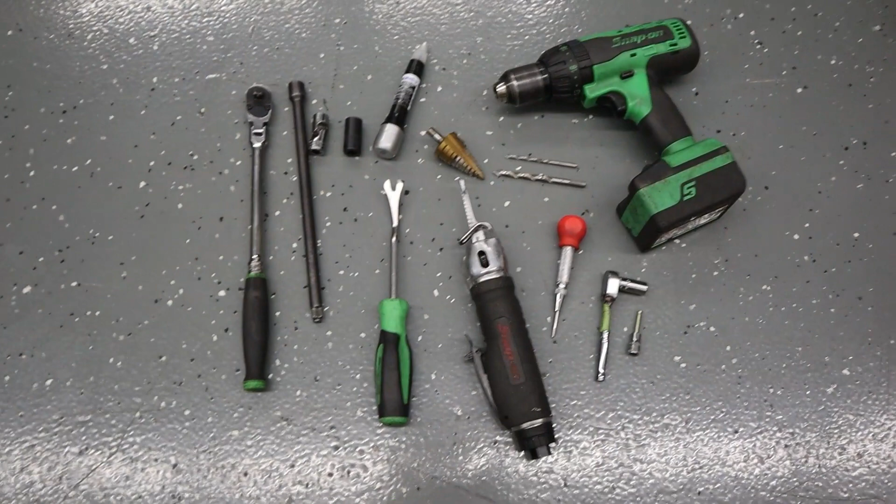Okay, tools we're going to need in order to do this. You're going to need a 3/8 ratchet, an extension, and I like to use a 13mm universal socket. You'll also need a regular 13mm 3/8 drive socket, some touch-up paint, and a panel popper or clip removal tool.

We'll need a body saw. You can also use a cutoff wheel if you want to use that to cut out the holes for the differential cooler. We'll need a step bit to make sure that we have a nice radius on those cutouts, and then an 1/8 inch drill bit and a 1/4 inch drill bit to precede the step bit, and a center punch for said drill bits.

A ratchet - I like to use a 1/4 inch ratchet on the 10mm stuff, a 10mm socket, a 4mm Allen socket or Allen key, and of course you'll need a drill for your drill bits.

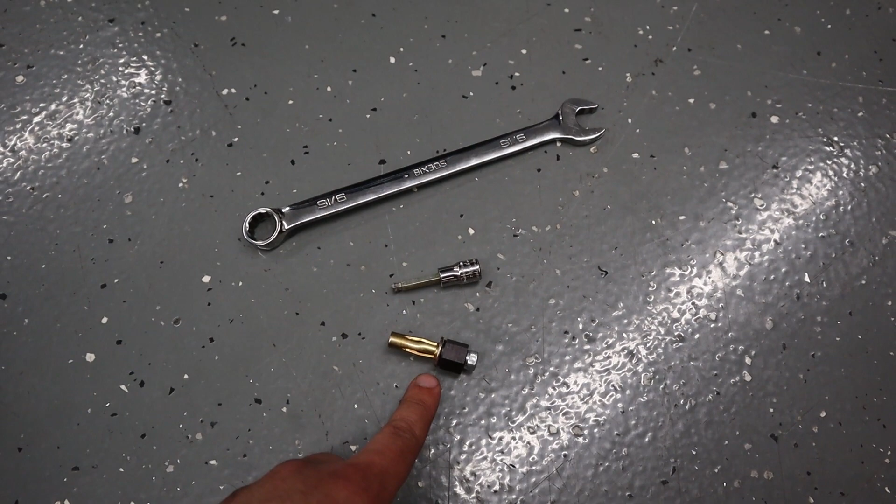Separately, for the rivet or riv nut installation tool, we're going to need a 5mm Allen socket or Allen key, and you'll need a 9/16 open-ended wrench.

All right guys, so the first step is to jack the vehicle up so you can get access to the underside of the car, make sure it's secured properly.

Then the next thing we're gonna do is unbolt the factory diffuser panel, and that's gonna be held on with two 10mm head bolts in the rear here and two 10mm bolts in the front. They're gonna be facing towards the rear of the car. There'll be a number of push clips here. And once you have all of that removed, you can basically go ahead and take this diffuser panel down.

I've already undone all the bolts and most of the clips, so I'm going to pull this diffuser panel down right now.

So once the rear diffuser panel is down and off of the car, we're going to have to cut or sand or break or drill the rivets holding the rear differential cooling duct off so that we can separate the two pieces from each other. And we're going to be taking the OEM ductwork that is currently on the car and transferring it onto your brand new diffuser.

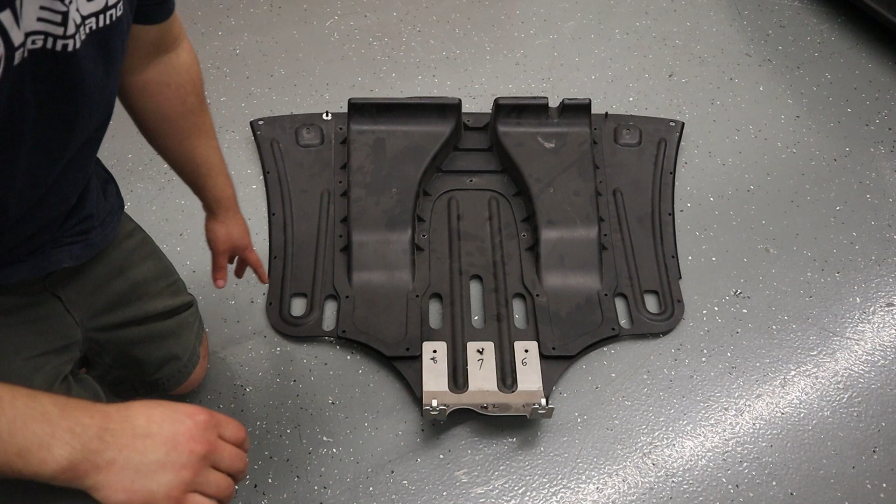Okay, so the OEM diffuser panel is going to look something like this. It's going to be held in, the ductwork is going to be held into the diffuser panel by a number of rivets that are around the perimeter of the actual ductwork.

At this point, you're going to want to basically snip off the back side of the rivet with a pair of cutters, or you could drill them out if you'd like. I opted for the cutters, I thought it was a little bit quicker. Drilling is going to be a little bit more time consuming, but it will ultimately be easier on your forearms if you have tendonitis like I do.

So once we get that off, you're going to be left with something like this. The OEM rear diffuser panel is going to go away, we're not going to use that anymore. And so all we're going to be focusing on is this.

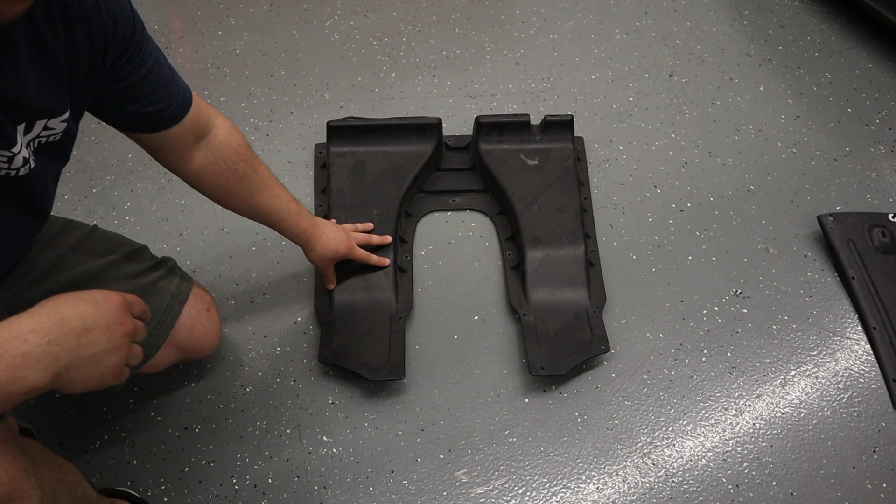Essentially we're going to be trimming this down at about this mark here in order to fit onto the new Verus rear diffuser. And to do that, we're going to have to cut out the templates that are provided with the kit. I'm going to show you that now and show you how to install them onto the diffuser so that you could get this all cut out correctly.

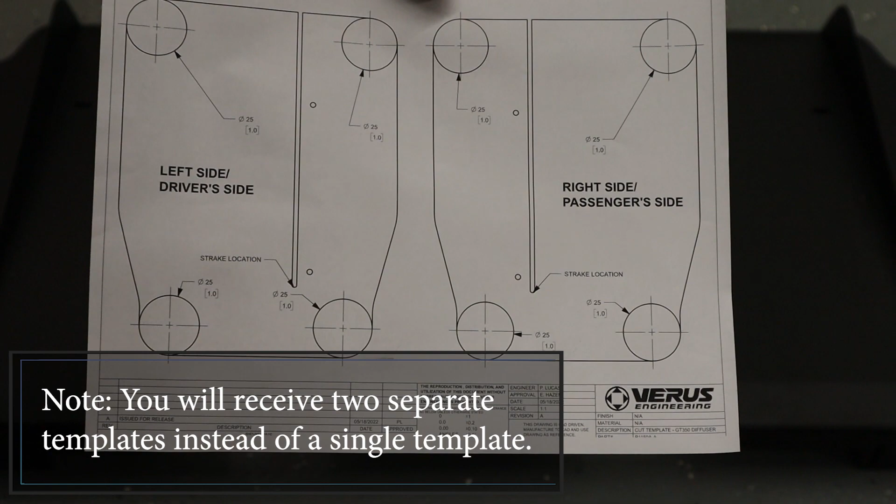All right guys, so here's the template that you would have received with the diffuser kit. Basically, we're going to want to cut these out. Make sure you cut out the center rib point here, and you're going to want to line this up with the strake that's going to center the template onto the diffuser. These are going to go around the two inner strakes on the diffuser itself.

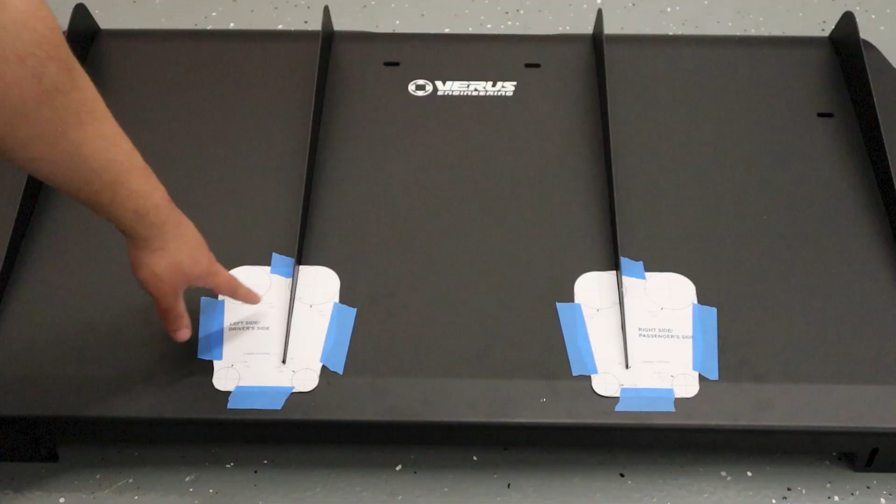As far as what we're going to be drilling here, basically we're going to drill out these 4 holes on each side or each template. I like to start with an 1/8 inch drill bit, step them out to a 1/4, and then use a step bit to take them out to 1 inch holes.

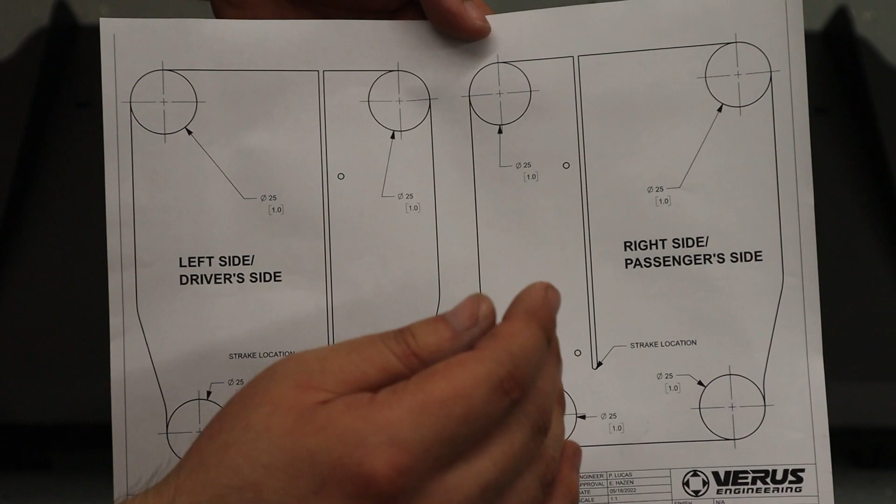You're going to want to center punch them first before you start drilling with your 1/8 inch bit. These 2 holes here are basically what hold the strake into the diffuser panel. So you'll want to center punch these as well, then drill them out to 1/8 inch, and then drill them out to 1/4 inch. That's going to release the strake from the diffuser material.

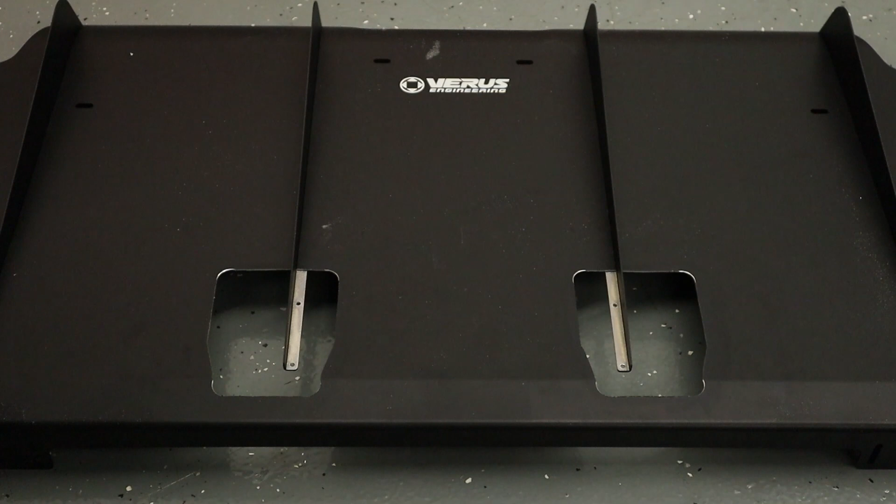Once you have that all set up and drilled out, you can cut out the material using a cutoff wheel or a body saw, whatever you feel is necessary or whatever you have available to you. Once you're done, you'll end up with something similar to this.

You'll notice that this flanged portion on the strakes on each side is pretty ugly now, so what we're going to do is cut off this flange. You can kind of see the silver part - we're going to cut that off so that all you see is the straight strake in the duct passageway here.

Once we cut that off, we're going to go ahead and clean up all of these edges. We'll touch them up with some touch-up paint on the raw sides or anything that's exposed, and then we'll be ready to go ahead and install the diffuser.

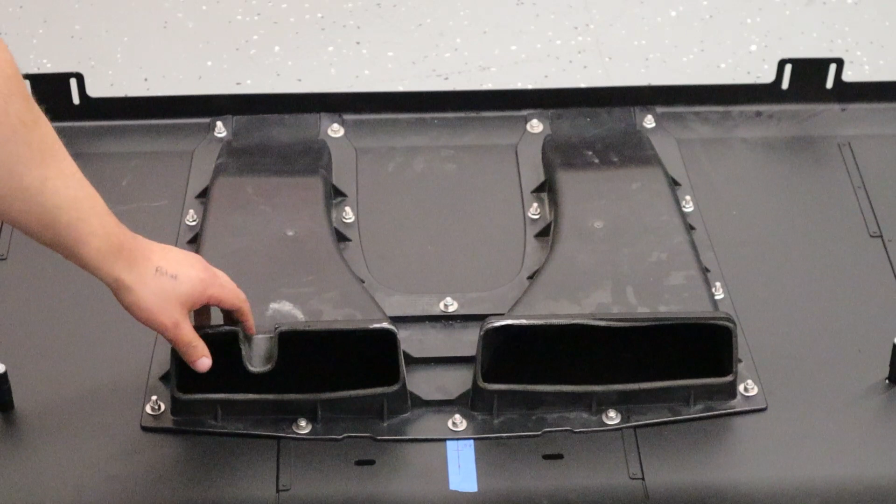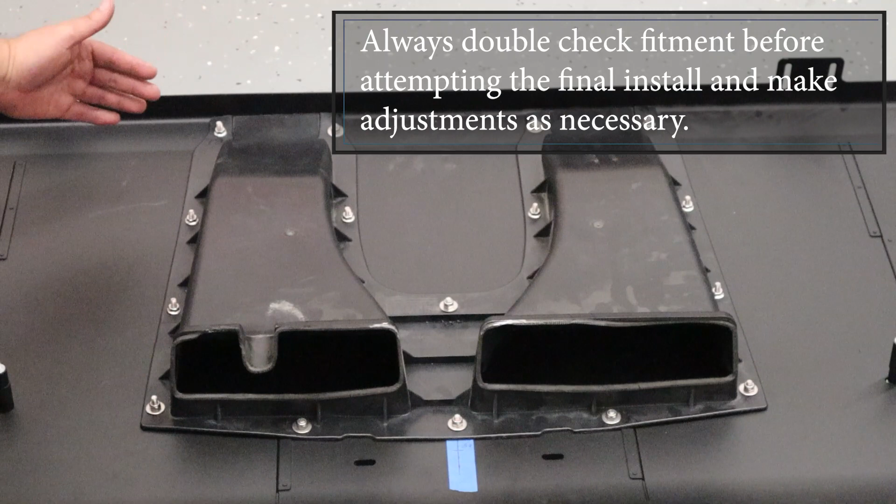In order to get this thing to the right length, because as it comes off the car it's going to be too long to fit on the diffuser, we're going to measure. What I did is take from this edge here, measured approximately 19 inches, and marked that on the leading edge of the duct. Tape it so you make a tape line or use a marker, make sure it goes straight across the leading edge of the duct - that will be the line you cut.

Once you have that marked, cut it straight across using a body saw or a utility knife, whatever cutting device fits you the best.

I just finished cutting the duct for the rear diff cooler. You can see I cut it here to the measurements that I stated previously.

What we're going to want to do in order to get this attached to the diffuser unit is basically measure the center line of the diffuser like I have here. You can't see it, but there's a mark here on that piece of blue tape. With that, I lined up the center hole for the ductwork, drilled that out to a 1/4 inch, and placed a bolt in the center there just to keep the duct in place.

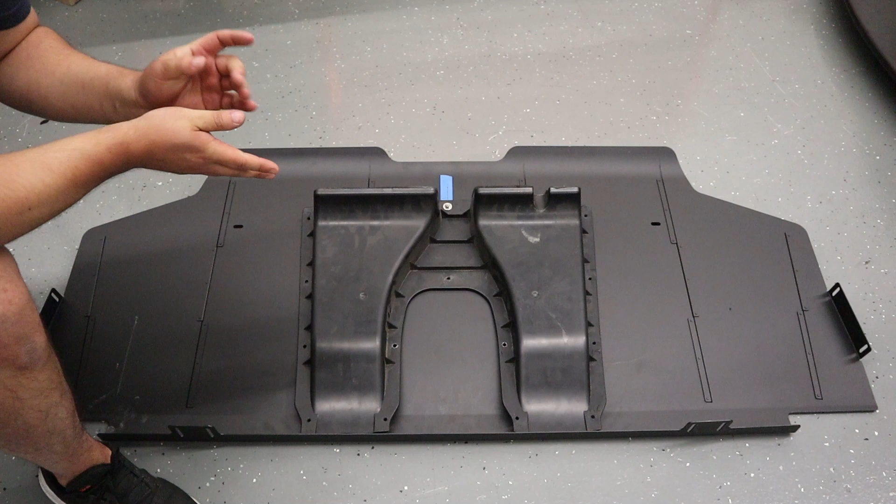That's going to help us hold the duct in place while we use a marker, paint marker, or scribe to mark all of the holes. We're going to drill these holes first to 1/8 of an inch, then drill them to a 1/4 inch, and that'll be good enough for the M6 bolts. I'm going to mark these out now, and then go ahead and drill them and install the duct.

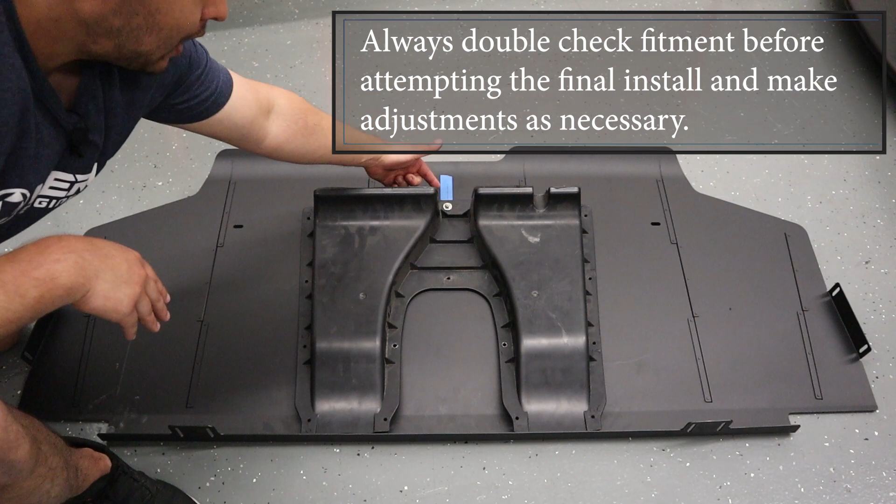Again, find the center line on the diffuser, line the duct up, and line this center hole with the center line on the diffuser. Drill that hole, put a bolt through it - that keeps the duct in place. Mark all of the other holes, drill them to 1/8 of an inch, then to 1/4 of an inch, and then we'll be able to install the duct fully onto the diffuser.

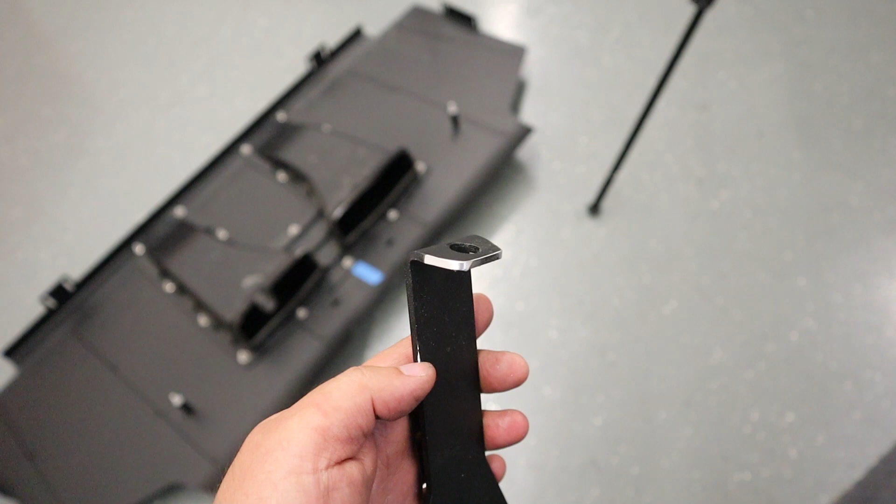We'll get to installing the diffuser brackets shortly thereafter. Okay guys, for the front brackets that bolt up to the sway bar bracket, you may need to modify them.

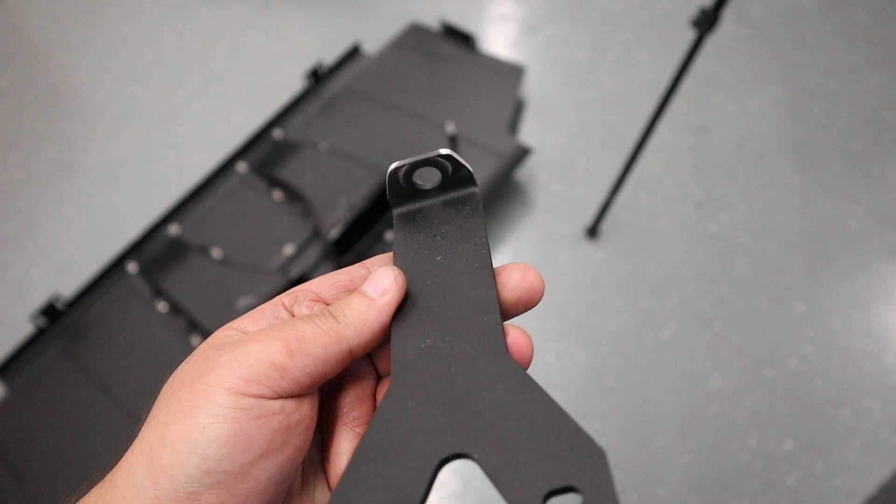These are originally going to be square. I took the corners off of them. There is a lip on the sway bar bracket that basically prevents this from sitting in there flush, so I just took the corners off so that it sits in there correctly. Obviously you're going to want to touch these up so they don't corrode over time, but just for dramatic effect to show you how I did it, this is what you'll end up needing to do.

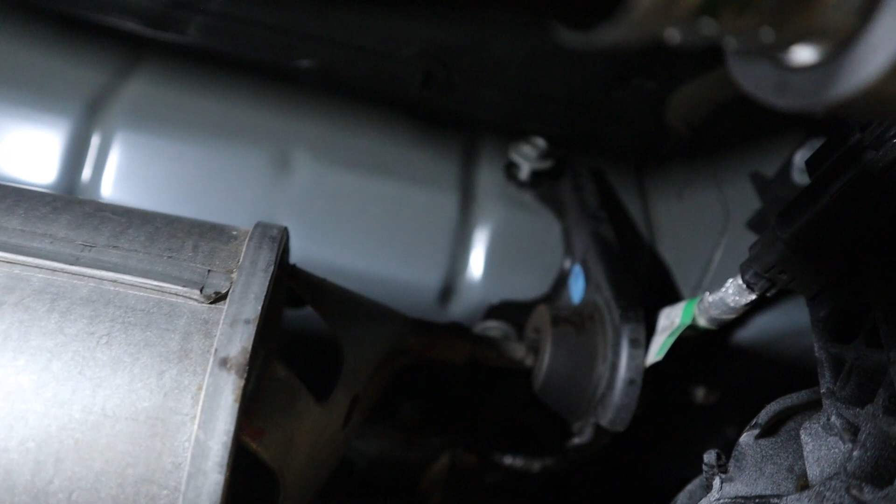We're going to remove the 13mm head bolt for the rear sway bar bracket, and the rear bolt. Then we're going to move over to the exhaust hanger and remove the upper bolt that is on the side of the frame rail. Again, both 13mm heads. Take those both out, and then move over to the outside here.

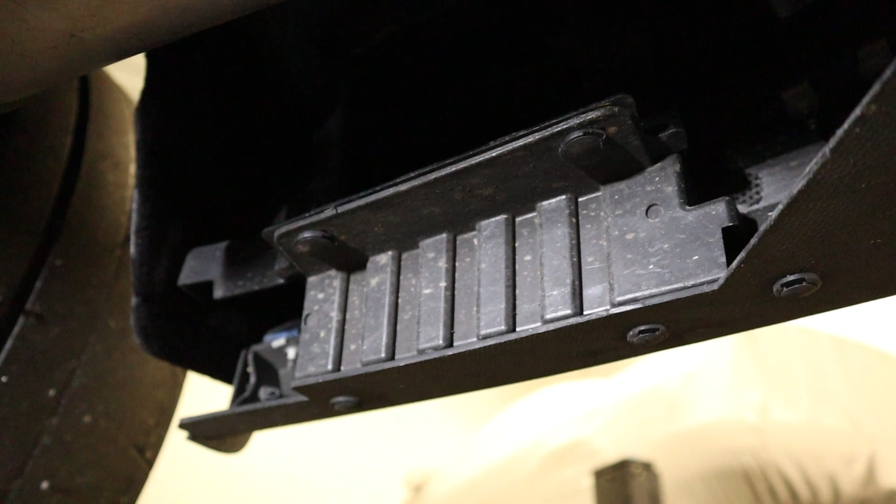This is where your outer bracket is going to go. We're going to remove these two pop clips with either a panel popper tool, clip removal tool, or a flathead screwdriver, whichever makes it easiest for you. Then we're going to install those with the two M6 button head cap screws, and we've got a little 50-50 action going on here, so I can show you.

Here is the front bracket installed on the sway bar bracket, and we've got the rear bracket installed with that exhaust hanger bracket bolt. And we've got the outer bracket installed with the two M6 button head cap screws.

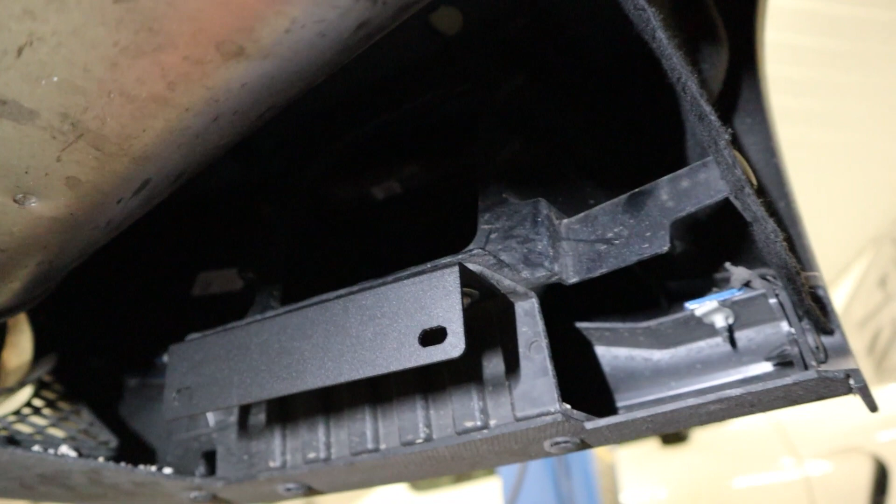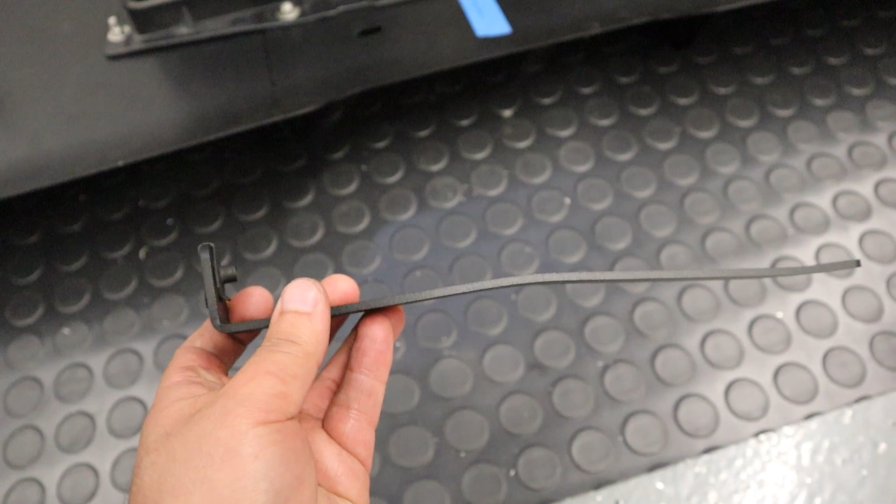Then we're going to take the rear brackets and slip over an M6 fold nut, trying to get it in the middle as best you can. Basically, this is going to help with installing the rear diffuser so that you don't have to fumble around with too many things as it goes up.

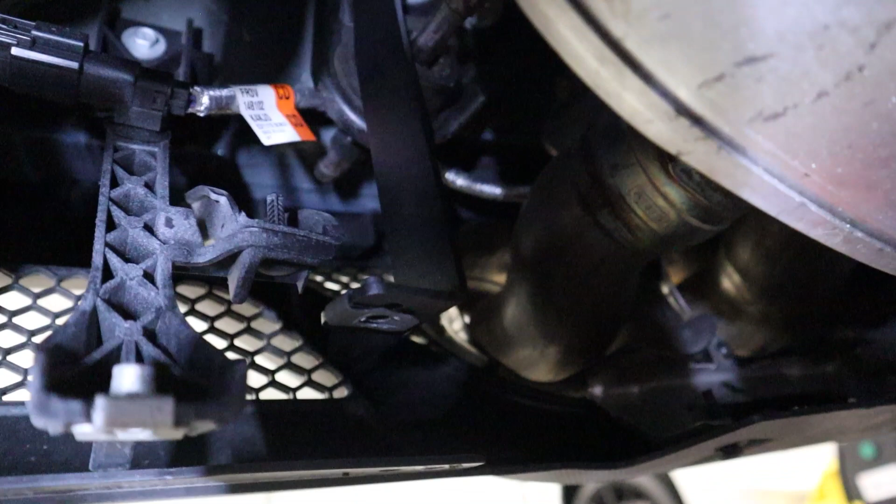Now, as you can see, while I rotate this thing around and play with it in my hand, there is a little bit of a bend here. It will not be bent from us because of the way the exhaust is situated on the GT350R. You will want to bend it around the exhaust hanger slightly, like that. I recommend bolting it up to the bolt up there and then kind of just pushing it over to bend it around the exhaust hanger, and that should give you enough clearance there to install it to the diffuser.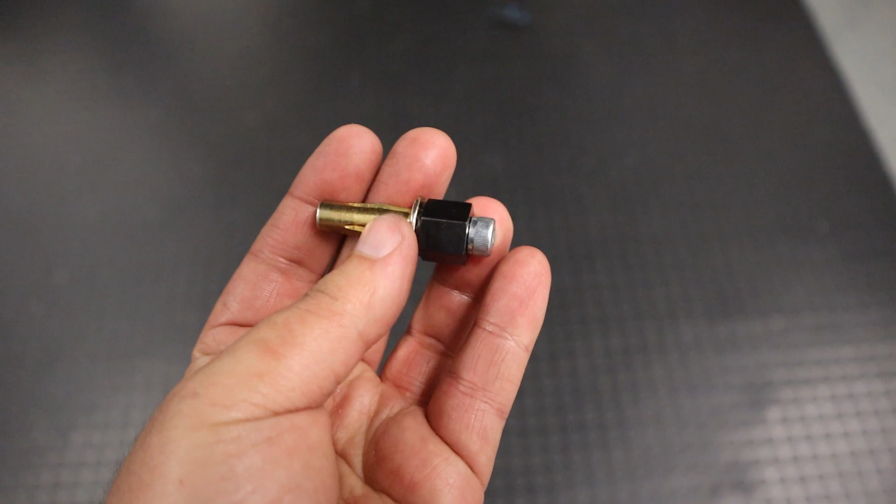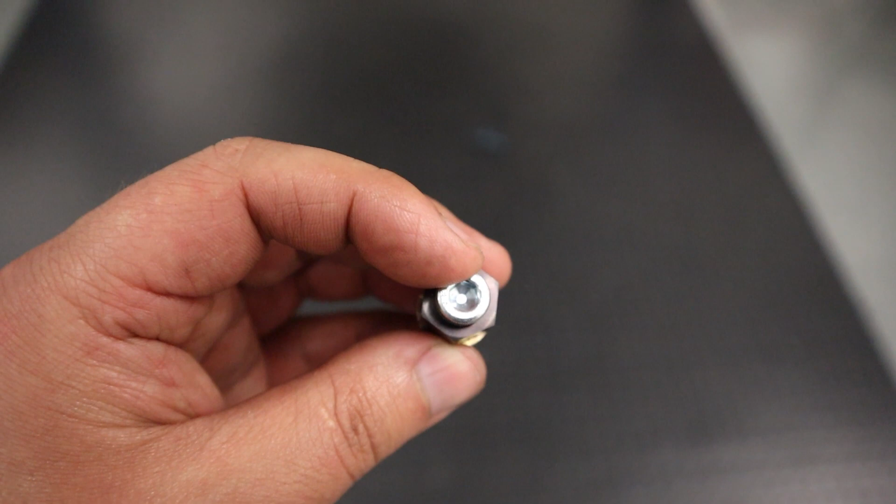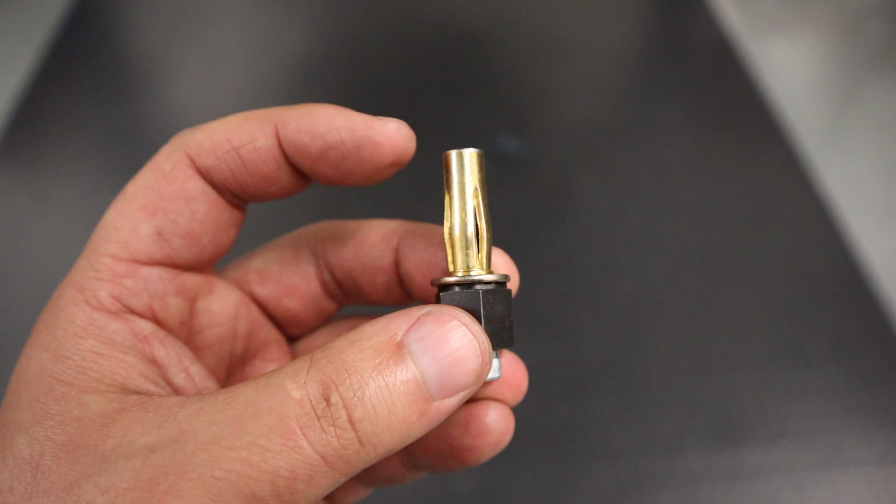Real quick rundown: you're basically going to insert the bolt portion, which is a 5mm Allen, and put it through the installer tool or the holdback, which is this black piece here. That is where your 9/16 wrench goes, and you thread the bolt into the rivet nut like I've shown. You hold the black portion or hex portion with the 9/16 wrench, and start tightening the bolt head with your 5mm Allen wrench or Allen socket, keeping going until you feel significant resistance, or until you can see the fins on the rivet nut are crushed sufficiently, and then you'll have a perfectly installed rivet nut.

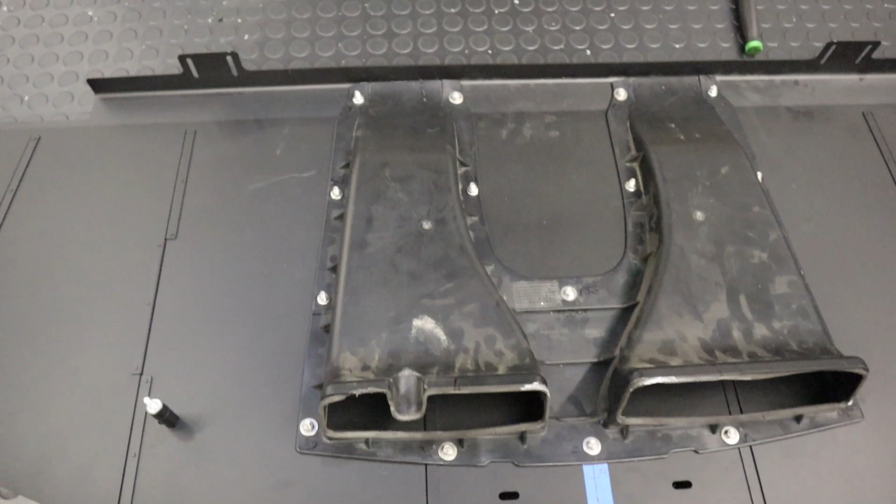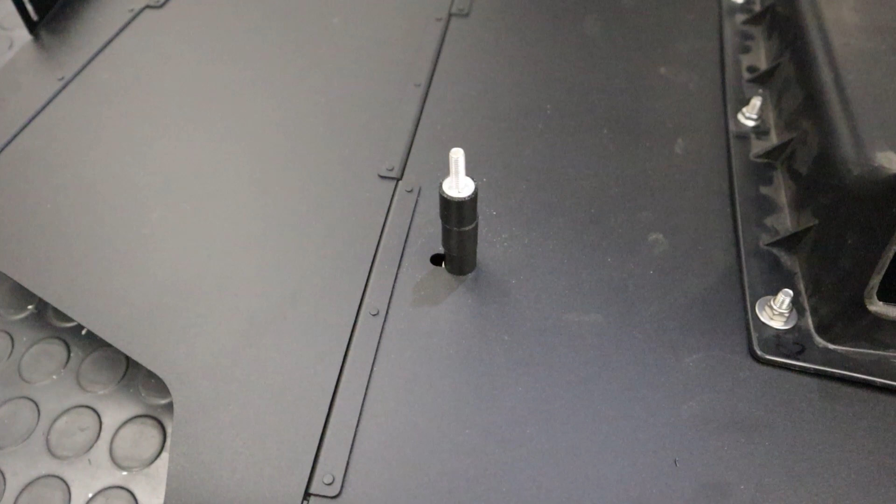We've got the rear differential duct bolted up onto the diffuser with the supplied button head cap screws. Now we're going to move on to getting the mounting hardware on to get this thing on the car. What you'll see here is our 70mm button head cap screw, an M6, with the 3 spacers stacked on top of the diffuser. Then we've got the M6 push nut on top that's basically holding it in place, so you don't have to fumble around with spacers as this thing goes up into the car. You're going to do that on both sides where the rear brackets are supposed to bolt up.

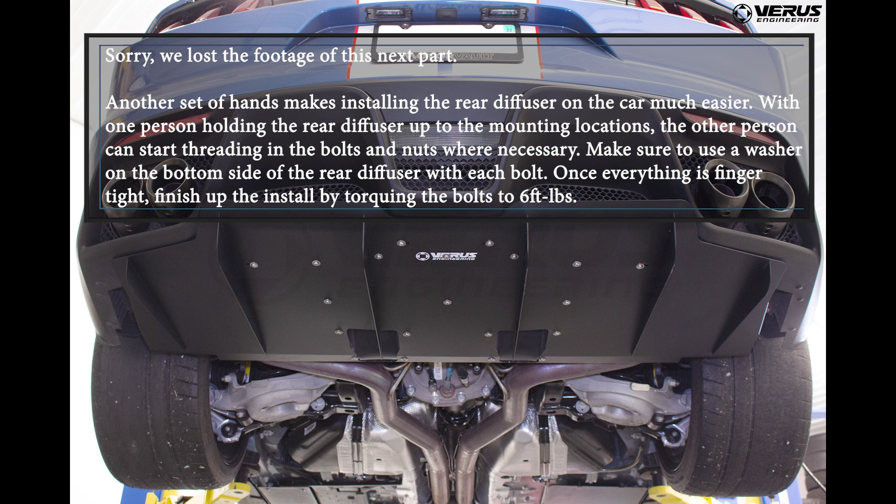All right guys, there you have it. That's how you use the cut templates for the rear differential cooler on the GT350R rear diffuser.